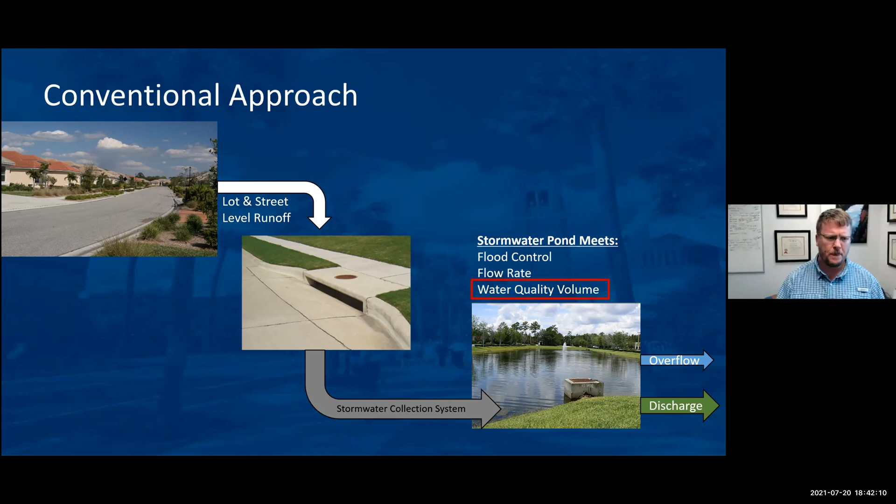And so that water quality volume is something I'm going to come back to.

Here's a breakdown of the size of rainfall events that stormwater ponds are generally designed for. We're dealing with stormwater runoff from events that are 5, 10, 15, 20 inches. These are massive events, like hurricanes, literally 100, 200, 500-year storms, 1,000-year storms. This size of event might happen maybe once in that system or pond's technical lifespan.

But we have to control the flooding up to a certain level, and usually the minimum is controlling up to the 25-year event. So for the Daytona Beach area, this is somewhere around the 9-inch storm event for a 25-year, 24-hour event. A 100-year event would be higher, and so forth. But essentially 9 inches of rain, that's a lot.

For example, we just got about 8 inches from Elsa that came through Gainesville at my house. That's been basically the most water we've gotten, even more than what we got from Irma. So, these are major events.

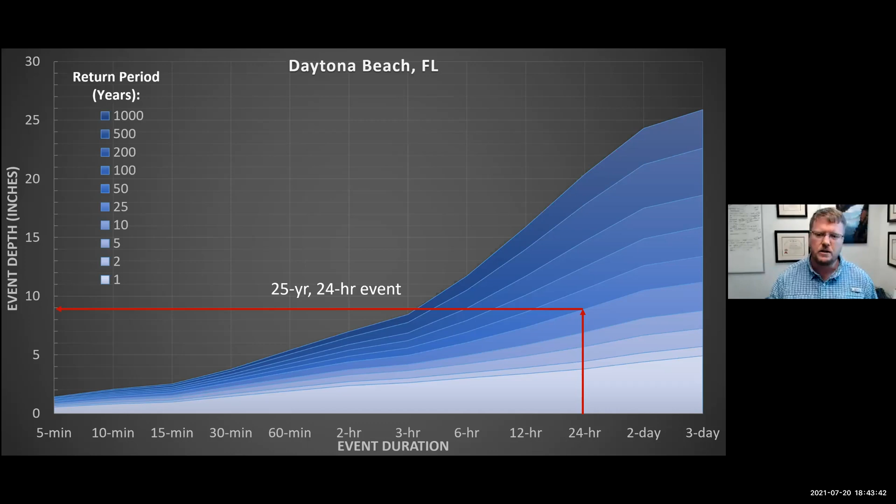But from the water quality standpoint, what we see is that stormwater ponds are designed for these large events, typically for flood control, but they aren't meeting the performance they're credited with. For example, they're credited with 80% removal of nitrogen and phosphorus. The basis for this was essentially that if stormwater ponds can remove about 80% of sediment, the thought was that nitrogen and phosphorus would be removed in similar fractions.

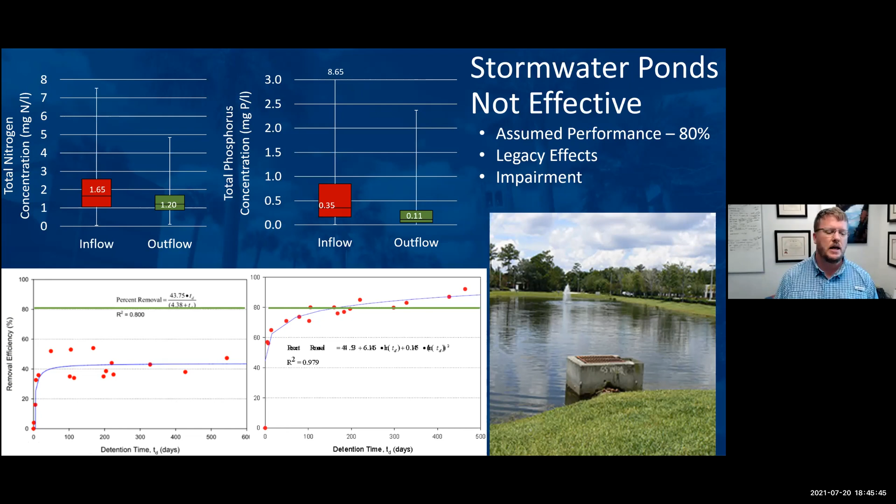Now, runoff is not the only source of contaminants and nutrients to our water bodies that goes along with urbanization. To some effect, septic systems, depending on where they're at, how they're maintained, and depending on their density, can also have an effect and impact on water quality.

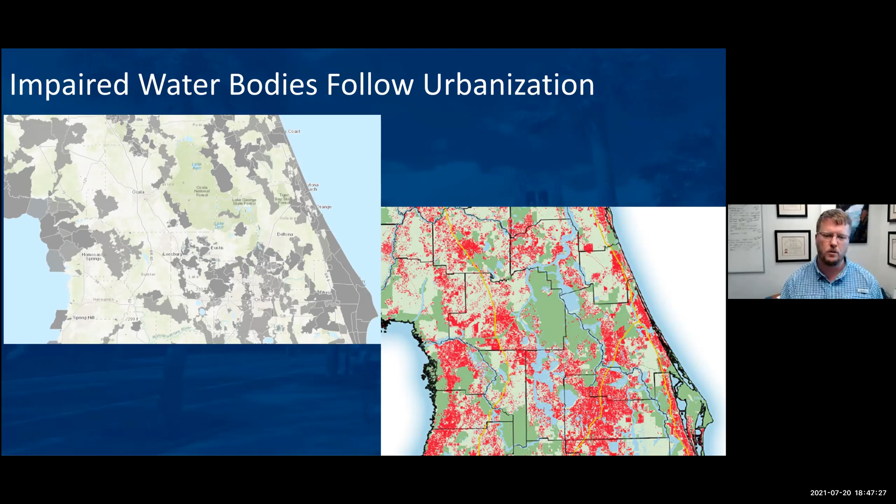But particularly in the highly urbanized areas, we tend to see that those small water bodies, those small watersheds, are heavily impacted by stormwater runoff in a multitude of ways, either through the addition of nutrients not being removed through stormwater ponds or lack of stormwater management, or through bacteria and other contaminants that can impair water bodies. And if we zoom in and look at Volusia County specifically, there's a lot of issues going on.

In this case, just about the entire county is covered in either a TMDL, BMAP, or some other type of plan meant to reduce or mitigate the impacts of whatever activity is going on at the surface. Some of these may be agriculture related, some may be wastewater or septic related. But many of the water bodies, particularly in the Daytona Beach area and growing out from the Central Florida, Orlando area, are in urbanized or urbanizing areas. And the way we're doing stormwater management is not going to continue to protect those water bodies or improve them in most cases.

So this essentially leads into why we need a paradigm shift in many ways. And the ironic thing is, as Katrina said, LID is not something brand new. It's really been around since the late 80s, early 90s, pioneered in Prince George's County, Maryland, and some other places doing similar things. Essentially, it's just a change in the approach to site design, understanding what the site offers and trying to work within that.

I mentioned early on that I wanted to separate these terms, LID and GSI, or low impact development and green stormwater infrastructure. A lot of times these terms are used interchangeably, but I hope with these definitions you'll see that there's a difference. It's subtle, but it's really critical to the whole development process and where these come into play.

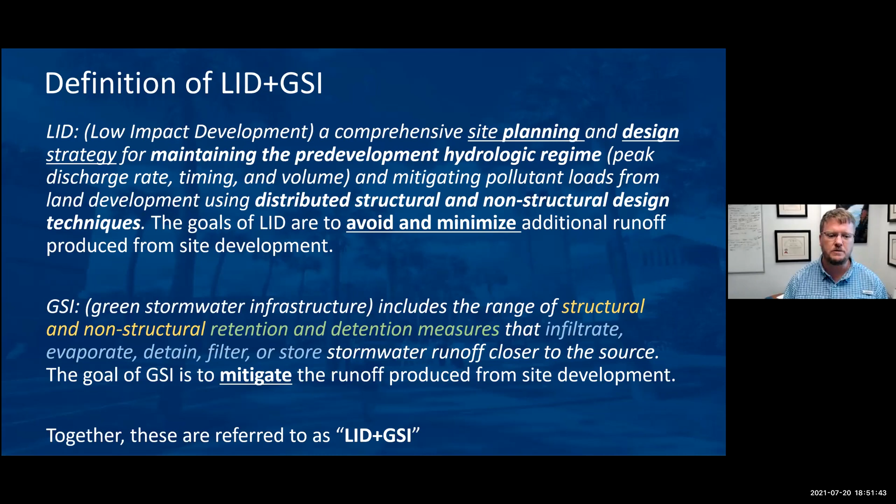So the cost of low impact development, does it save money? Is it more expensive? Well, it depends on a lot of factors. Every site is going to be different, and that's a broad answer we get when asked if LID is cost effective. Well, it depends, that's an easy way of avoiding the answer. But I hope to show some ways certain projects do save money and what strategies they use to implement LID that result in reducing runoff and reducing costs. The EPA has even put together several resources, some of which I'll touch on here.

So let's get into a little detail here with the planning stage in LID. And I'm going to be perfectly honest.

The content on the next page and a few others that I come across at the very bottom, I will blatantly say I stole it with Tom Singleton's permission from a manual he put together for Winter Haven, and this is verbatim. But I have gotten approval from Tom to use and abuse it. I think he just did a really great job hitting the nail on the head of the key steps here, and I want to pass those along.

So the first step, when we're looking at avoiding the impacts, basically we want to map and protect whatever the green infrastructure is on the site. What are our depressional areas? Where are the forested areas? Where are the areas that have a lot of value and resources?

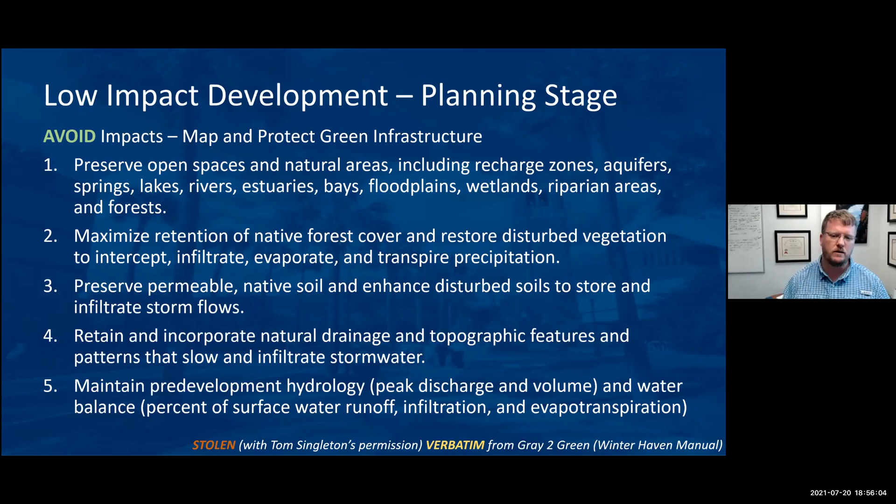So a couple examples here. This is a development that was proposed in East Central Florida. Some of you may be familiar with this. It's not too far from Volusia County. In fact, it may be in Volusia County, I believe. It's a site called Restoration.

The original site design, if you look on the west side of this site, essentially had a lot of wetlands in existence, a lot of poorly drained soils, and the site that was being proposed was essentially spreading out and utilizing the full site environment. That was sort of the conventional approach.

We went back to the drawing board, worked with some folks here in our program for resource efficient communities and others to kind of re-envision what this site could look like, taking the LID approach. What you see on the right is essentially what they came up with. They were able to, through compact design and compact development, concentrate the disturbance of the site and the change in the overall site hydrology to the east side. It basically snugs up against I-95, which is on the eastern boundary there.

What this did was it preserved those wetlands. What you see in the brown area here was, if I recall correctly, basically a trail system, trying to use the recreation areas. But this also allowed the wetlands to maintain their hydrologic function. What we see is when we have large flooding events, large rain events, the wetlands flood, and that's where the water should be stored, not in our residential areas or in artificial structures, or at least we can use those wetlands for that large storage.

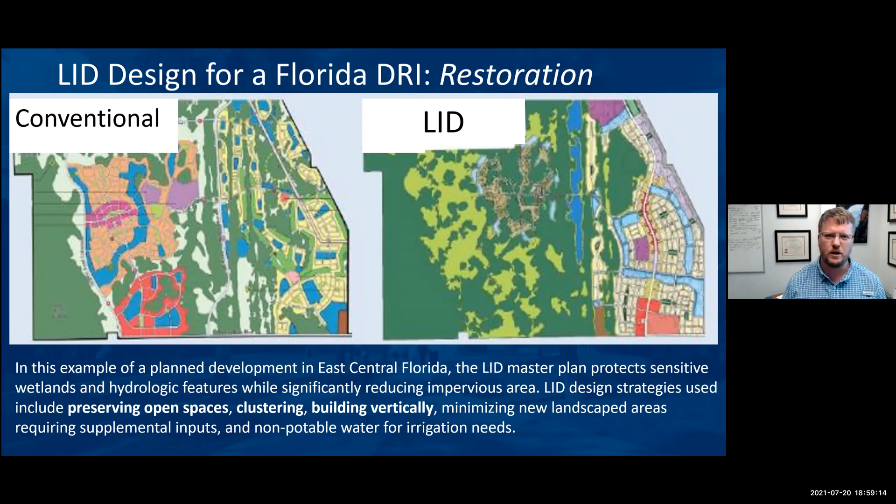Just some examples here of site planning. Number one, getting away from master grading, complete site clearing, which ignores what resources are on site. That first step of site clearing and grading sets the course for the overall site, and that really starts at the planning point. If the plan starts with clear cutting and master grading, you're locking into a more expensive drainage system, because you're going to run pipes all over the site and need stormwater ponds for all that area.

Preserving those natural areas and looking for ways to consolidate and condense the development, not reducing the number of units, but looking at how the development can be more compact and limit the disturbance. If you're limiting the site disturbance area, you're limiting the area where you have to manage stormwater runoff. There are many iterations of this, but on the right is a comparison between a conventional site design and a low impact development site design.

We're limiting the amount of roadways here. You see we've got two basically islands in the LID design, but we've drastically shortened the roadway length. We've got a lot more open space and area remaining in conservation. Those conservation areas are oftentimes utilized for recreation or for storage during large storm and flood management, utilizing those natural vegetated site depressional areas for what they do anyway, collecting stormwater runoff during large events to manage it on site.

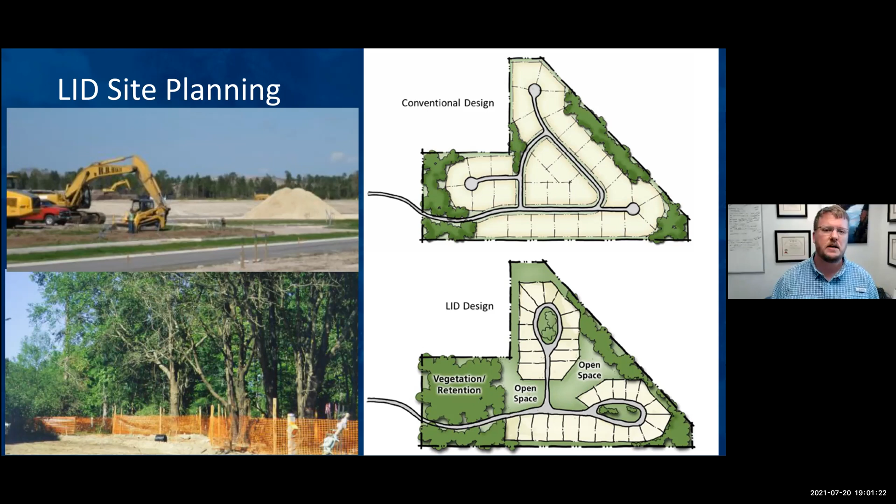Moving into the second part of this, minimizing the impacts. So you've identified where the critical resources are on a site, looked at where you want to avoid and protect areas, and tried to compact it as much as possible. The next step is looking at how to minimize those impacts, basically fitting the project to the site rather than trying to fit the site to the project, which is often where we see the disconnect.

Step six is reduce, minimize, disconnect, and eliminate impervious surfaces to maximize infiltration. Think about conventional site development, maybe your own home, since this is pretty prevalent wherever we are. A raindrop falls on the rooftop, flows over the roof, maybe goes into a gutter, or falls onto your driveway, then flows into the street, down the curb and into a storm drain inlet, through a pipe, and eventually into a stormwater pond.

That raindrop never has the opportunity to actually infiltrate into the ground. We've basically removed that as an option. So one of the biggest things that can be done to mitigate or minimize that is minimizing the imperviousness, and then if there is imperviousness, disconnecting that imperviousness.

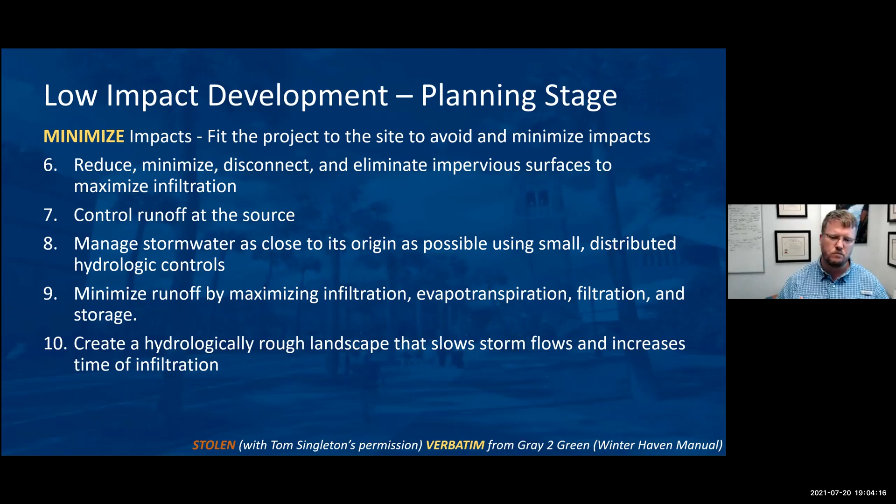With soils, the amount of water it can take in depends on the soil properties, specifically its infiltration rate. If water moves across it too quickly, it doesn't have an opportunity to work its way into the ground. Having a longer residence time or flow path through the development allows for more processes like infiltration, biological treatment, and chemical treatment to improve water quality and reduce volumes.

A couple more goals are to employ natural processes for water quality improvement, extending the time water moves across the landscape, and increasing the reliability of storm systems by providing multiple redundant runoff controls. When we talk about distributed stormwater practices, it's not just spreading it out across the site, it's also creating redundancy, so if one practice fails or needs to be taken offline during a storm event, the overflow often goes into another practice downstream before it still gets treated and has an opportunity to be infiltrated.

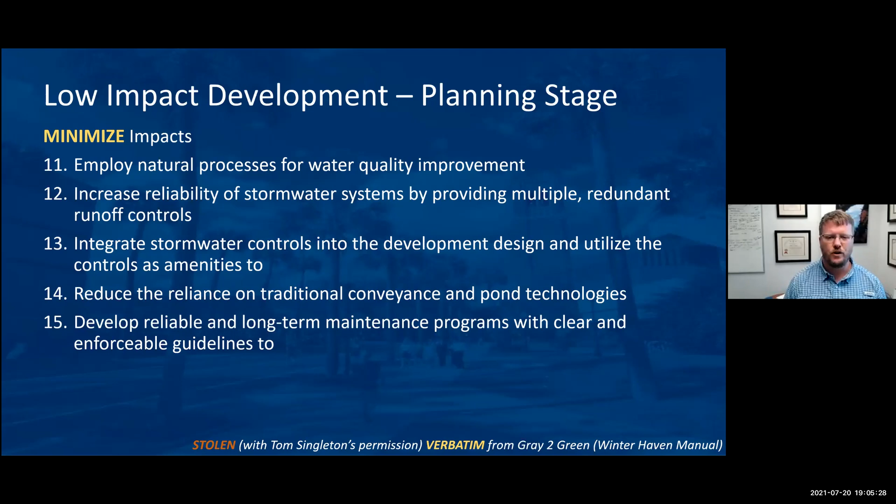We want to integrate stormwater controls into the development design and utilize them as amenities, reducing reliance on traditional conveyance and pond technologies. Finally, we develop reliable and long-term maintenance programs with clear and enforceable guidelines to make sure these practices function over their lifespan.

So what do these non-structural practices look like? We talk about reducing the impervious area. This points to a shortened driveway — we don't necessarily have to have a really long driveway that separates the house from the street. This saves impervious area and reduces the amount of runoff.

We have vertical construction here, where we could have had single-story construction, but instead we've gone to two stories, cutting our footprint basically in half and reducing the amount of impervious cover.

Creating areas near where the source of runoff is being contributed — for example, rooftops, instead of having gutters, if we can avoid it, the water flows instead of onto impervious cover, a roadway, or into a drain. We have natural areas off to the side of the lot where that water can collect and infiltrate. This is a curb cut, a very simple design that allows water coming off the roadway to exit into this natural area to infiltrate.

Maybe one of the most common ways this is realized, not even intentionally, is through the implementation of swales and bioswales — we'll get to the difference between those. Swales are a great tool; unlike a stormwater pipe, the water in them is held in place. The stormwater swale allows infiltration as water flows through it, and any depressional areas capture and hold back water, allowing it to infiltrate without flowing downstream. This also provides disconnection of the impervious area, giving another opportunity to reconnect the hydrology of the site.

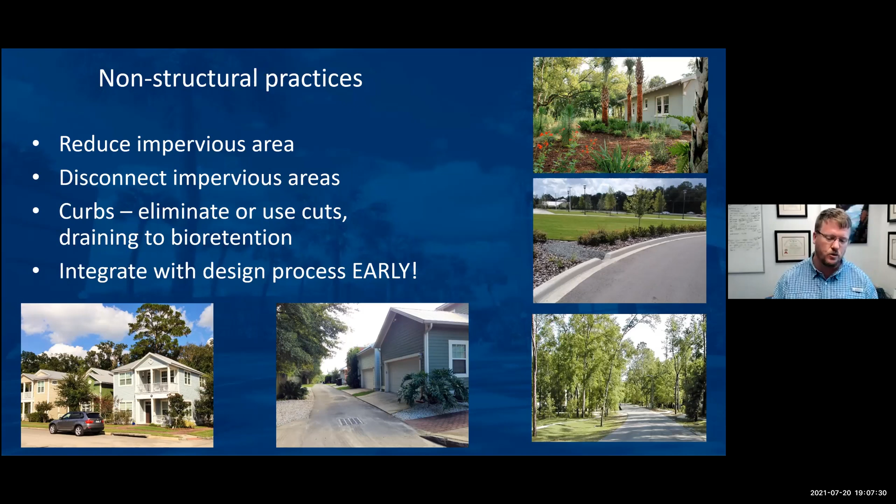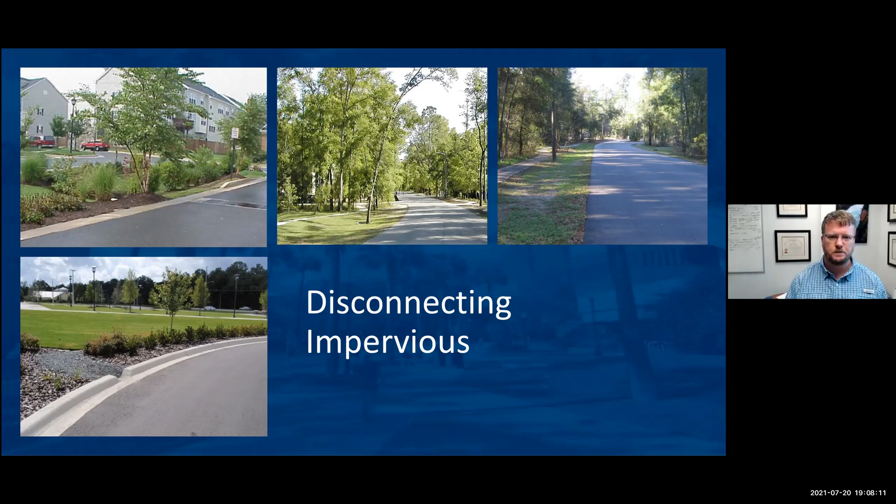Some more examples of disconnecting impervious cover are right along the roadways, within the right of way, which avoids having stormwater management practices encroach on individual lots where maintenance may be an issue, or a homeowner might decide they don't want a swale or rain garden on their site. If it stays in the right of way, we maintain function, and these linear systems can be rather effective.

Traffic islands are not as common in residential areas, but you'll see these in a lot of commercial areas and parking lots, where we're taking advantage of the opportunity that's there. In this case, it's not really what was there before, but what's typically designed and incorporated into parking lots and site designs.

So leveraging those areas where it would have been just a grassed area, maybe elevated, and instead turning it into a depression, allowing some of that water to go into an area and collect and infiltrate on the site. This picture in the middle goes against what I'm about to say, but it can create an opportunity with GSI by incorporating, for example, a rain garden or bioretention cell in these islands, so you don't have to do mowing of that infrastructure on a regular basis. There's different maintenance that goes along with it, but oftentimes it's less intense.

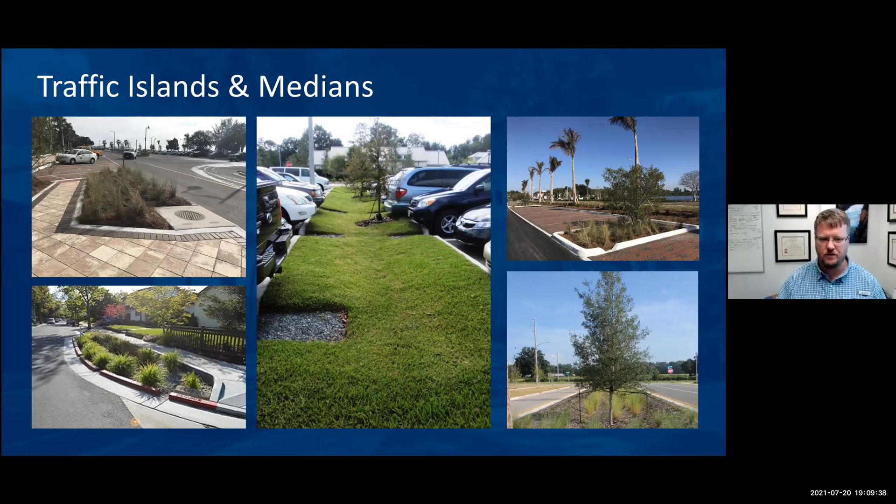Now, I include this picture though because at the end of the day, you can have a bioretention or a rain garden or a swale here that is grassed, and it provides a function. It may not be as easy to maintain, it may not be as effective in certain cases, but it's still an option if you have to go with that.

So then the third part that I've stolen from Tom in this way is getting at the green stormwater infrastructure. Part one was avoiding the increase in stormwater runoff. Part two was, hey, we've tried to avoid as much as possible, let's minimize the amount of runoff that's being generated. And then part three here is essentially, how do we mitigate the runoff that's being produced?

Green stormwater infrastructure and looking at different types of practices. Now, not all of these practices are going to be realistic for all situations, and I'll come back to the compatibility between GSI practices and the development setting a little bit later on. But you can see some examples of common practices that are used and can be integrated into developments. Now, I want to say one thing.

Ideally, we like to see LID and GSI coupled together, but you often will see that LID is disconnected from GSI. And what we really see oftentimes is that we'll see an implementation of GSI without really the site design and planning that comes from LID. So, for example, I went to a recent, pick your big box store, and essentially what I'm seeing...

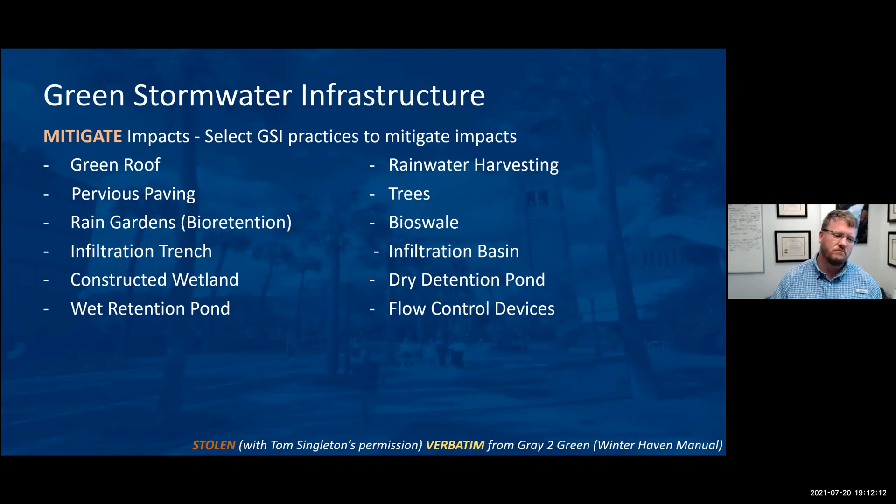Coming back to this diagram that I had earlier, and this really gets at green stormwater infrastructure. This is the size or the range or the scale of storms that our stormwater ponds are designed to be able to manage or capture and convey. We're looking at storms that are on the order of several inches, tens of inches, over certain, several hours or over the course of a day.

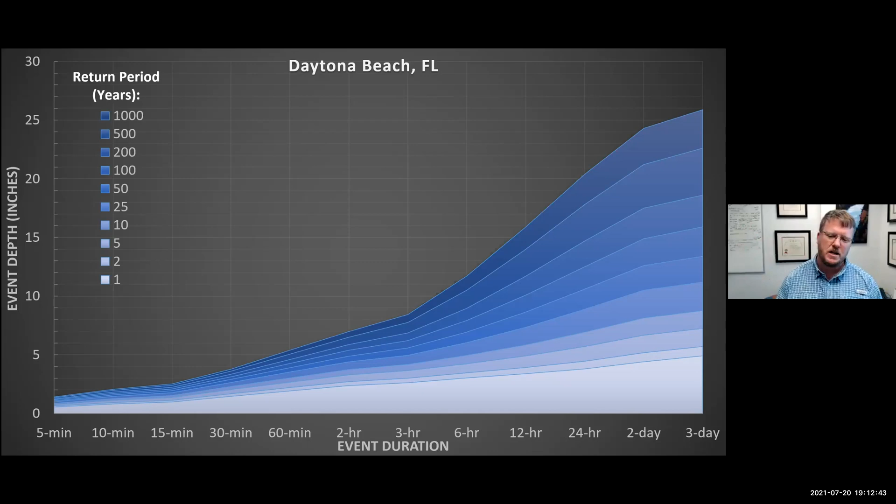But if you look at the actual distribution of rainfall events, this took the rainfall data for 30 years from Daytona Beach Airport, and basically took their daily rainfall, anything that was a tenth of an inch or more, and just ranked it and looked at what the percentage distribution was. And what we see here is what we see in a lot of places, that the overall majority of stormwater events that happen on a regular basis, these small events that transport pollutants from the watershed into our stormwater ponds...

Or into our water bodies, they're pretty small. So for example, in Daytona Beach, about 80% of all storms that would produce runoff, that's where that 0.1 inch comes in. If we have less than 0.1 inch rainfall, really don't call that a runoff producing storm in many cases. So if we have 80% of those storms are an inch or less, we're not talking about a huge volume. We're not talking about this massive volume that a stormwater pond needs to manage.

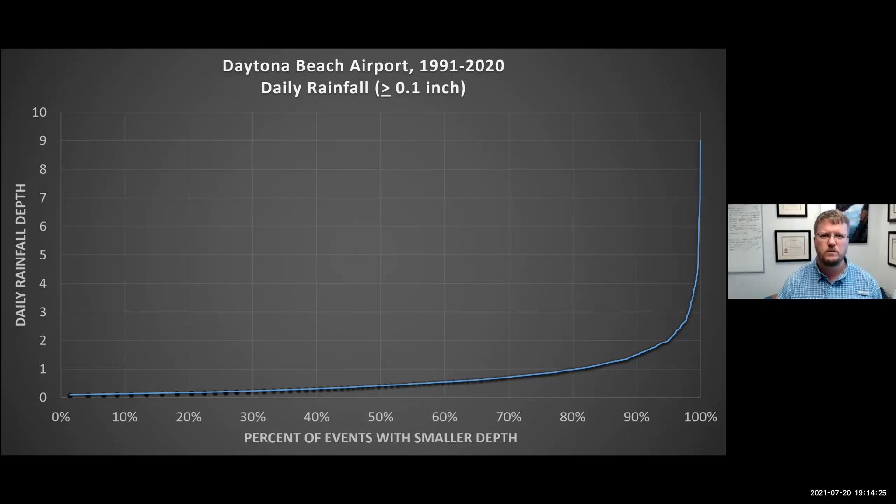So for these regular storms, 80% of storms, we're talking about pretty small volumes that need to be captured, filtered, infiltrated, or managed, moving it through the site. It's interesting how it kind of lines up with certain values. So if you want to remember, 80% of the rainfall in Daytona Beach, 80% of those events are about an inch, 90% is about an inch and a half, and about 95% is 2 inches or less. It's an easy way to remember that.

This figure is where I wanted to talk a little bit about the compatibility of green stormwater infrastructure with certain development zones. I'll talk about the cost of permeable pavements in a bit, but oftentimes that's used as an example of, oh, well, LID is too expensive. Well, yes, in certain cases. I wouldn't use permeable pavement in a rural or low density residential area. It just doesn't make cost sense unless I can reduce or eliminate a stormwater pond, or the cost of land is really high.

Same with green roofs. I would even say that the figure here showing that green roofs are in general urban zones might be a little bit generous. I'll show some examples of why green roofs just aren't the best option for stormwater management or GSI from a purely cost perspective.

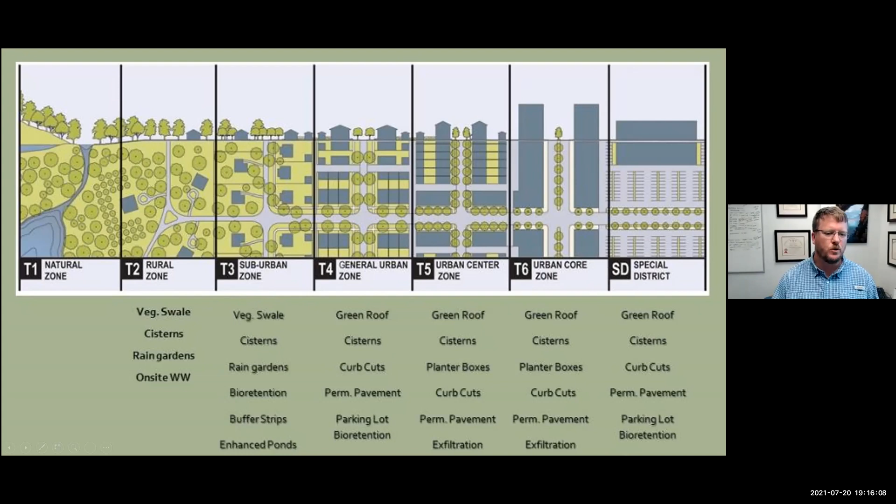But you see that as we move from different development styles or development densities, we have different types of GSI practices that get integrated into that landscape. You think of the roadway cross section, what kind of fits within the available space to give that functionality we need for stormwater management, these regular small scale storm events to protect our water quality and manage those larger storms as well. So you'll see there's a transition that occurs.

I like this figure because it goes into a way of thinking about how these GSI practices are a lot of times different repackaging of similar functions. When I think about GSI practices, I think about their primary functions, and that's what needs to be maintained, that's what needs to be emphasized, and how do we incorporate that function into that landscape or development area.

So for example, from over here on the high end, or the high function end of treatment, we have constructed wetlands, infiltration basins, bioswales, that have a lot of biological treatment, but they're repackaged at different scales, different functions. We have permeable pavement, which is primarily infiltration trenches, rain gardens, tree box filters. It's all kind of the same primary function, but it fits into the landscape differently. Permeable pavement is for typical impervious areas. Tree box filters and infiltration trenches are your linear areas where a lot of that water can infiltrate.

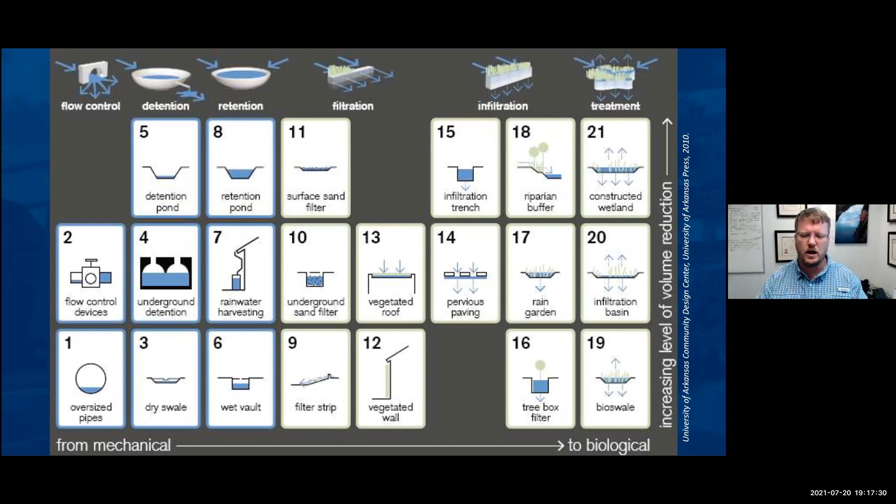Permeable pavements, as I mentioned, I'll be honest, are one of my favorite GSI practices because it allows you to basically park on, drive on your surface while also having stormwater management within it. It's probably my favorite practice. If you look at porous concrete or porous asphalt, the way to identify it is that if you look really close, it basically looks like a Rice Krispie treat. That's how you can identify it.

Permeable pavers or pavements are a little bit different, where the infiltration occurs between the pavers themselves, typically with a gap between them. But when you get below the surface, porous asphalt, porous concrete, or pavers, the profile is pretty similar. You typically have different stone aggregate layers that have a porosity meant to receive rapid infiltration of rainwater or runoff, so it can be stored and built up, usually within a depth of about 14 to 16 inches. Then that water is allowed to, over time, slowly infiltrate into that subgrade soil.

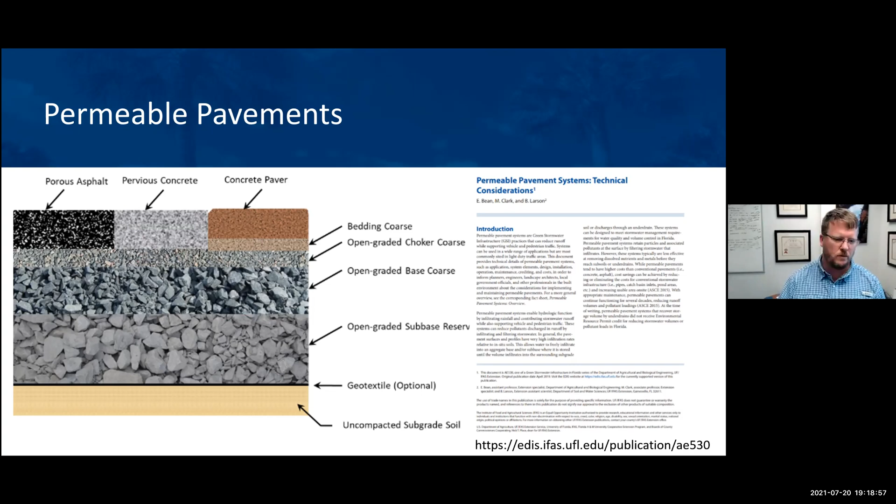We have an extension document, an EDIS document, if you go on IFAS, that goes into the technical considerations of permeable pavements and covers a lot of factors. One of the main ones is cost, looking at how these different types of pavements' costs range. What we see is that there's a difference between looking at just the pavement surface, the actual porous asphalt or pervious concrete material at the surface, and then considering the cost of system installation.

This is going to be more expensive than conventional concrete or conventional asphalt. However, that's not really comparing apples to apples, because conventional pavements also have to have a pond or some other type of stormwater treatment to go with it. The real comparison is looking at this cost compared to the conventional pavement plus the cost of the necessary stormwater pond or other stormwater infrastructure.

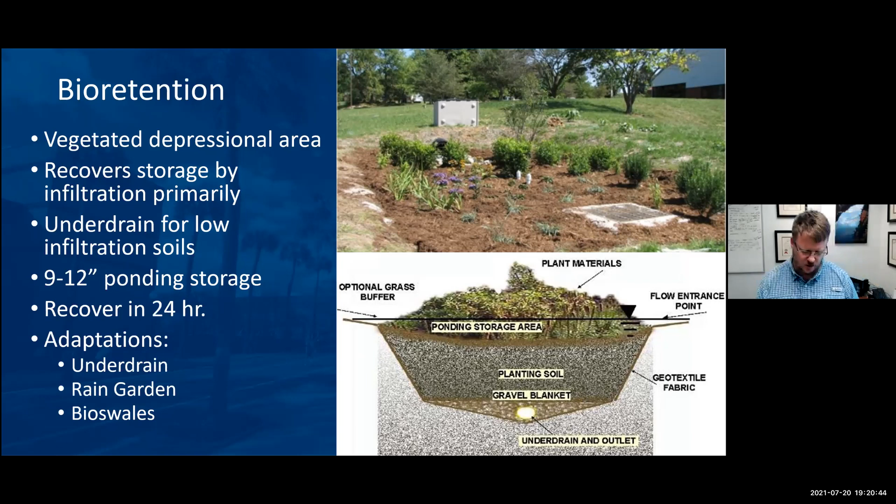Bioretention is another common practice that is easy to incorporate into the landscape. Oftentimes these are kind of the vegetated depressional areas. You can make use of existing depressional areas or construct your own in the design. The primary function is to capture and then rapidly infiltrate. We want these to infiltrate within about 24 hours, to avoid them becoming ponded and stagnant, becoming mosquito pits. If we have soils that are not well drained, we can put in an under drain, which can help reduce the time it takes for water to draw down. There are several different ways to do the configurations that I'll talk about in a minute.

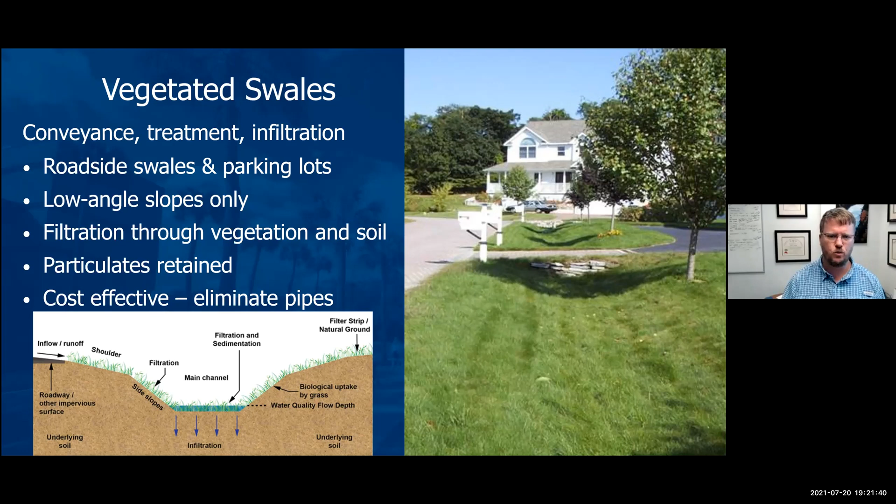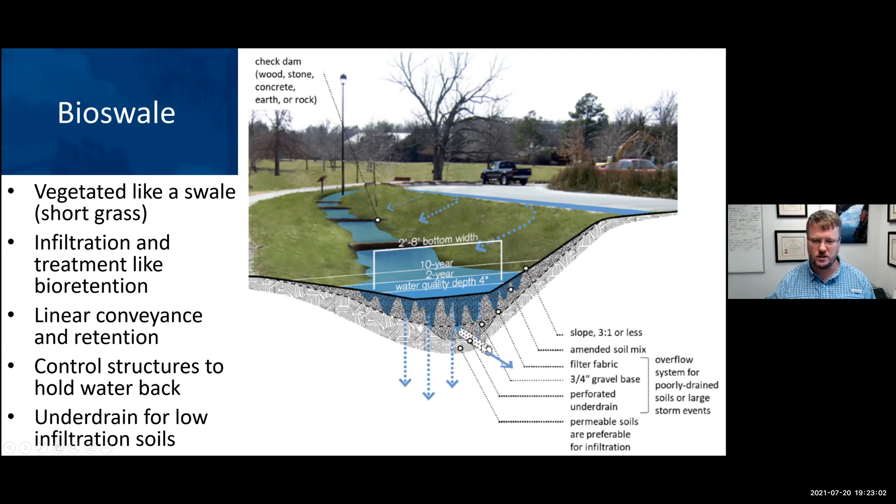This is an example of one that we have here in Gainesville. It's a little bit more urbanized than a residential setting, but it shows how this can be implemented into a very narrow right-of-way and still have quite a bit of functionality. Essentially what happens here is you can see there's a row of bioswales or cells upstream. Water comes straight off of the impervious area, and it overflows these little half walls as water builds up in each cell. The upstream and downstream cells are connected by a pipe underneath, and there's an underdrain pipe that goes underneath the full length of the system.

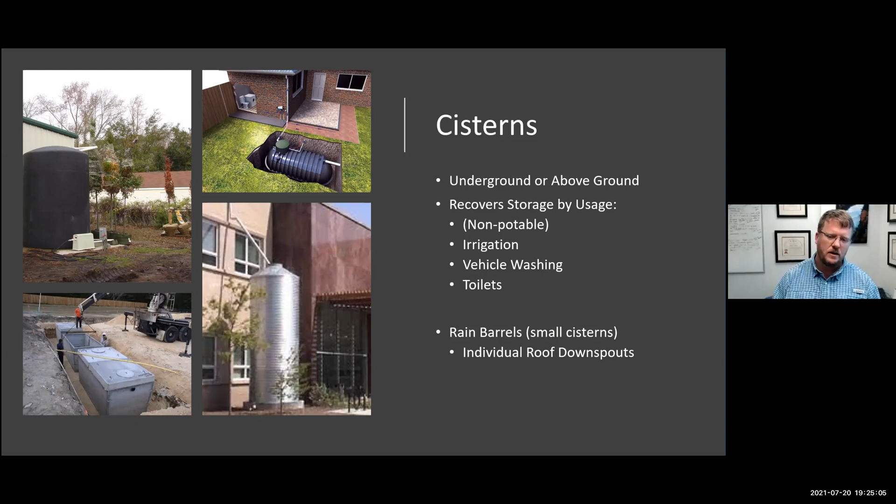Cisterns are getting into practices that are more appropriate for higher density or higher urbanized areas rather than typical low or medium density residential areas. But cisterns can be a very useful practice, particularly when it comes to water conservation, and there are several different ways to do rainwater harvesting. For example, you can have cisterns or large tanks that are above ground or below ground. Or for a reservoir of some type, there are large bladder bags that can go, for example, underneath a deck and fill up with rainwater to be used for irrigation, which can be a water conservation method for homeowners. But essentially these tanks can be above ground or below ground, and the main concern is making sure there's a use dedicated to using that water on a regular basis, so that volume is recovered in between storm events and is available to capture.

Nutrient separating baffle boxes, it's kind of borderline whether it's green stormwater infrastructure. It's a good way of integrating several different processes into a stormwater pipe system, or kind of a retrofit.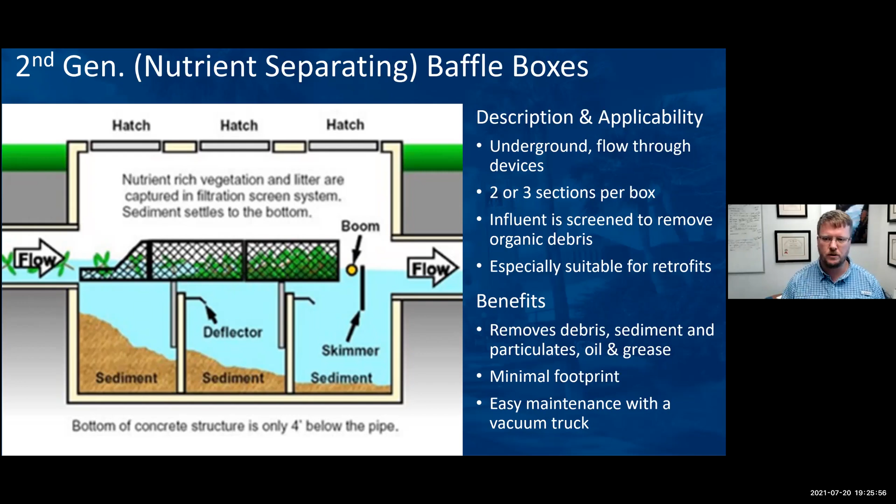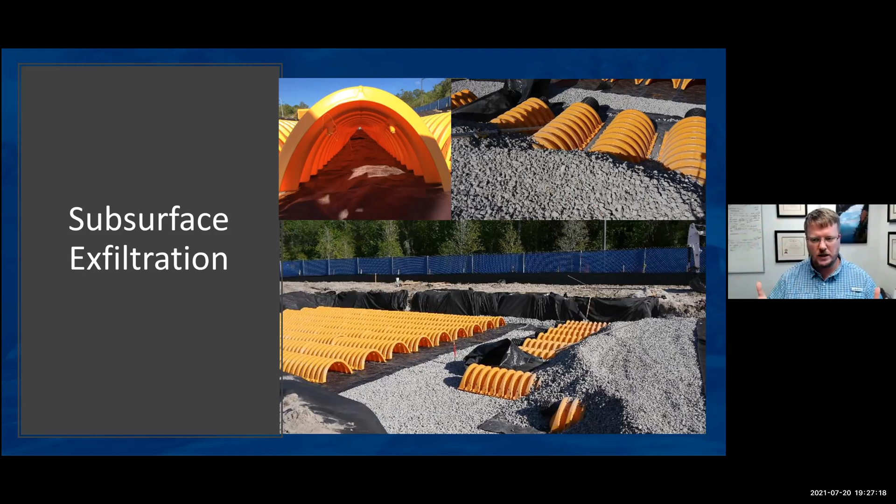This network of half pipes and drainage infrastructure is put down in the ground. We have a filter fabric underneath the half pipes, and a stone base layer separates it from the subsoil. On top of this, it gets filled with a stone aggregate layer, and then we build the parking lot or roadway on top of that. So the runoff from that area goes right below it, and it can build up quickly and infiltrate over time there.

So green roofs, I'd be remiss if I didn't mention it. Green roofs are essentially trying to create a very shallow vegetation cover on the rooftop of buildings. The idea is that there's a certain volume of water that, when the rain falls down, is captured into this thin soil layer. Typically about an inch of water can be captured, but some larger implementations might have a deeper rooting depth, up to maybe even a foot of soil medium.

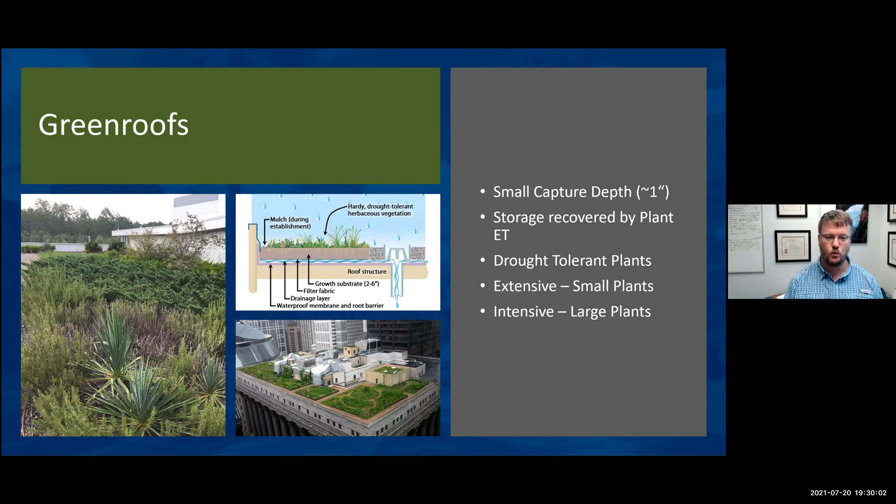Okay, getting into case studies. This really gets into the brass tacks of where LID saves money. I'll be honest, there are only a few example case studies from Florida that I could find, but the trends and the ways that LID saves money in these other example cases are consistent. These have been implemented - these are real cases around the country. The way that LID saves money is pretty consistent, and hopefully you'll pick up on that.

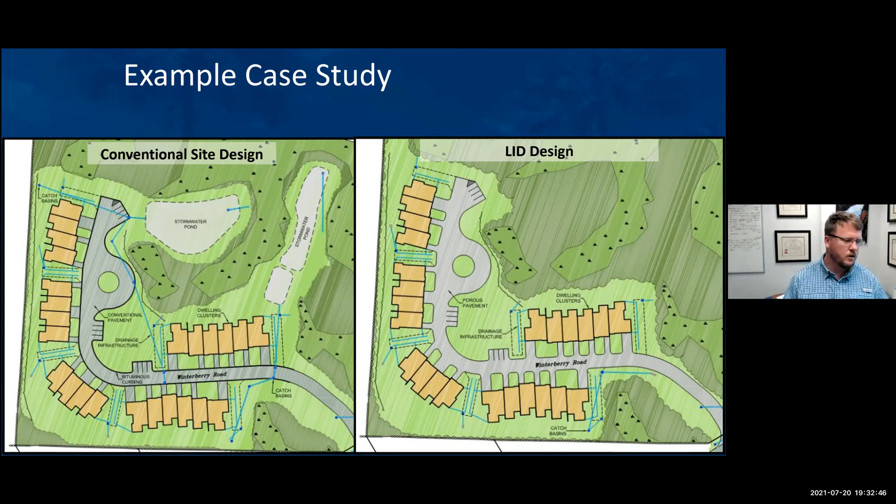So when we look at the comparison between the conventional design and the LID design, the LID design avoided 1,616 feet of curbing, 785 feet of storm pipe, 8 catch basins, 2 detention basins, 2 outlet control structures, and 1.3 acres of land clearing. All of those kind of add up.

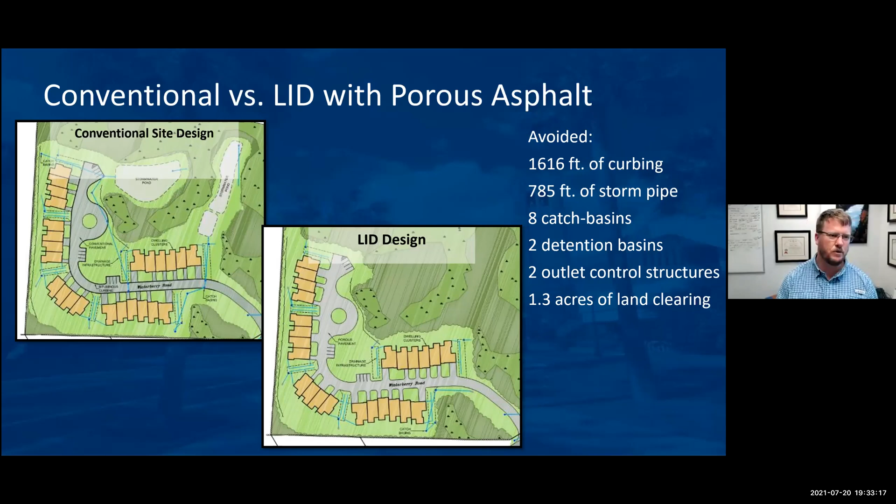Now remember, they used permeable pavement though, and that's more expensive than roadway. This is a good example here of where it comes in and makes sense. Site preparation - this cost is looking at the grading and the clearing. We have less area with the LID, so we have less cost with site preparation.

Temporary erosion control - well, we have a smaller disturbed area, so our temporary erosion control is less. Our drainage, we reduce several things as far as stormwater ponds, our catch basin inlets, and all that infrastructure. Roadway was a higher cost because they used permeable, or porous, pavement. The driveways were also porous pavement, so those costs increase.

But just looking at those 2 items doesn't look at the whole site. Curbing - we eliminated the curbing from the LID design, saved us $6,500. Permanent erosion control, we were able to save again almost $20,000. Additional items kind of came out in the wash, the buildings stayed the same and those are basically the same, but overall they saved $49,000 on a $4.4 million project - overall 6% savings on total costs of the infrastructure for what was a 0 discharge site.

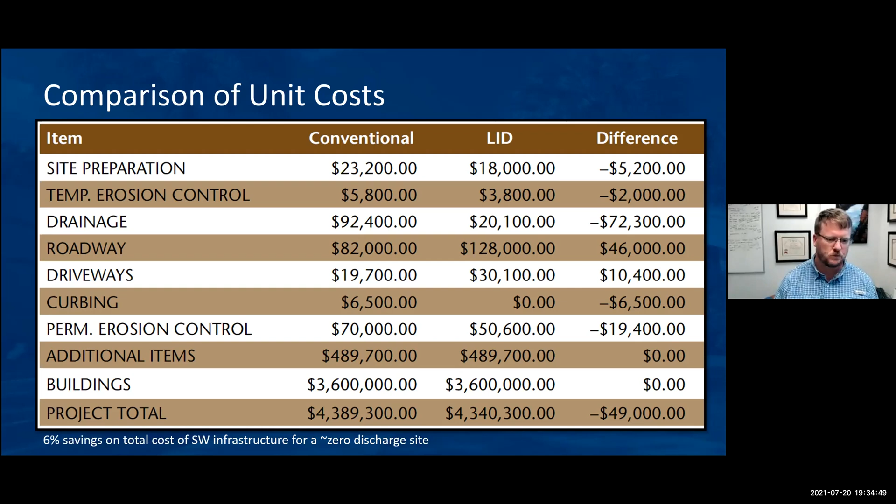So that's one example. The EPA has a document that covers a lot of case studies, ending up being from a lot of areas in the north of the country. I'll get to a side point as to why these case studies are so hard to find - we'll answer that in a little bit, at least why I suspect it is. But this document did a nice job of working out the costs for conventional development versus LID and what those cost differences were.

Now, if you're looking at these numbers, there's probably one of these sites that's really standing out, and it's probably Kensington Estates. Holy cow, they increased the cost from LID by $737,000. The price difference was almost double for the stormwater management. And I saw that and I was like, what in the world? What happened here? Why is this the case?

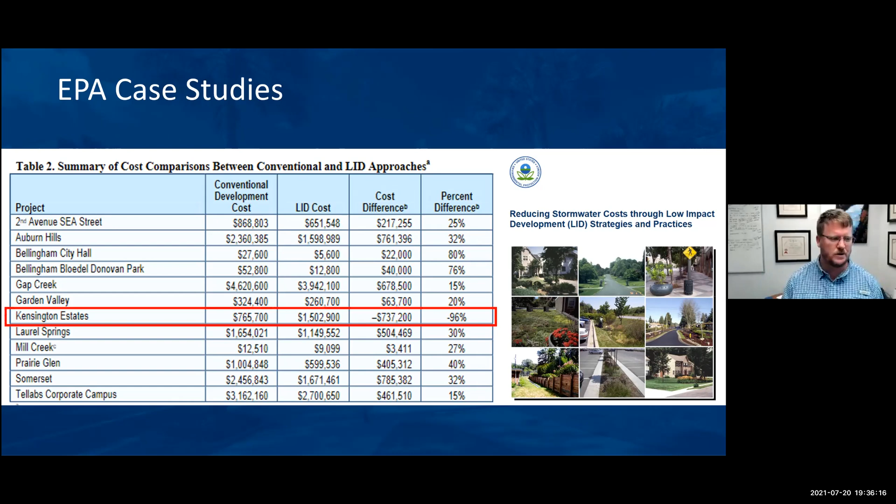When you look into what the LID comparison was, again, I'm not sure it's apples to apples when the LID proposal included rooftop rainwater collection systems for every house. It's not the approach that I would take or recommend that's most cost effective.

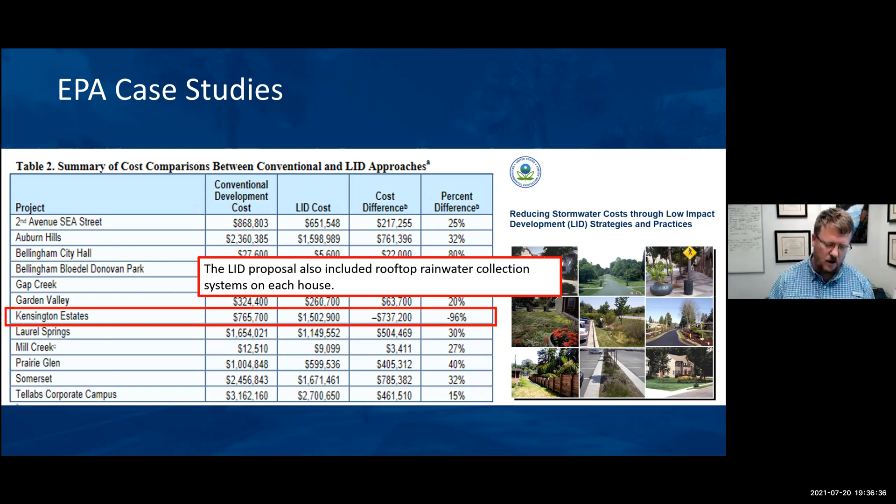But you look at all the other ones, and I'll go through some of these of how these are saving, where the money savings comes into play.

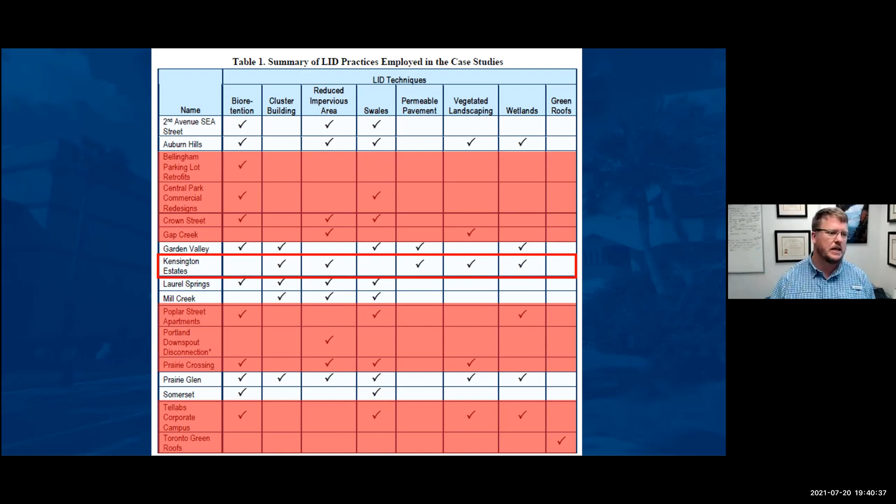And only a few of these are residential for the most part. Only a few of these use permeable pavements, okay? And this was, again, sort of that Kensington Estates that had that really high pavement cost. The permeable pavement was partially to do with that, okay?

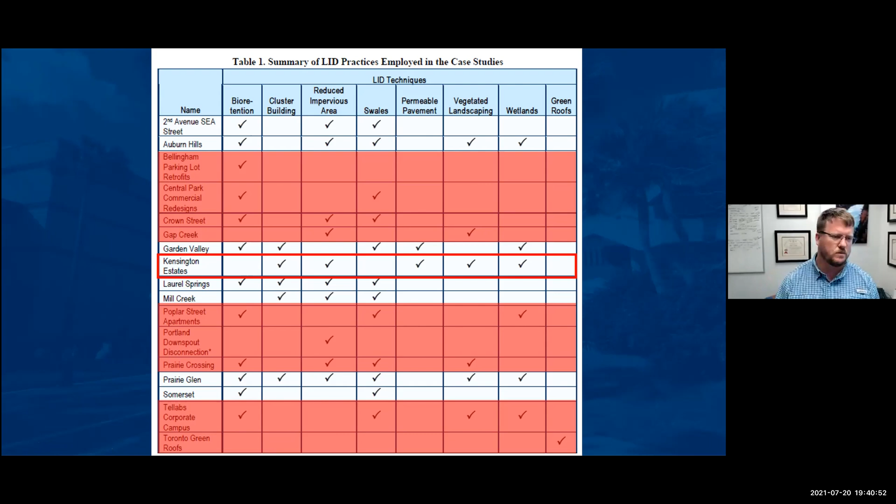So I have a few case studies to kind of report on that are from Florida. Student Daniel Penniman did this work for his master's, and there's two from sort of our region, so to speak.

The first one here is a Central Florida residential project in Lake County, kept anonymous for good reason in some ways I'll get to at the end. The site was 170 acres, projected to have 493 new residential units. The soils here were decent, pretty average, a B soil - like a loam with a moderate amount of fines, not a heavy clay like you'd find in the Panhandle, but not a well-drained sand either. The depth of the water table wasn't well drained - in some areas 3 to 6 feet, which starts to affect some of your options for infiltration on site.

So how did this break down? The conventional design was essentially 3 centralized retention basins, requiring 750,000 cubic yards of grading and 14,000 linear feet of stormwater piping. By comparison, the LID GSI design was 26 shallow storage areas - think of these as bioretention areas or rain gardens - mostly connected via vegetated swales. They preserved 51 acres of existing green space used for recreation and large volume storm event stormwater management. This saved basically 300,000 cubic yards of grading and 12,000 linear feet of piping, with smaller pipes than the conventional design. Overall, they saved just over $2 million on the site - a 40% reduction for site grading, and a 92% reduction for stormwater management.

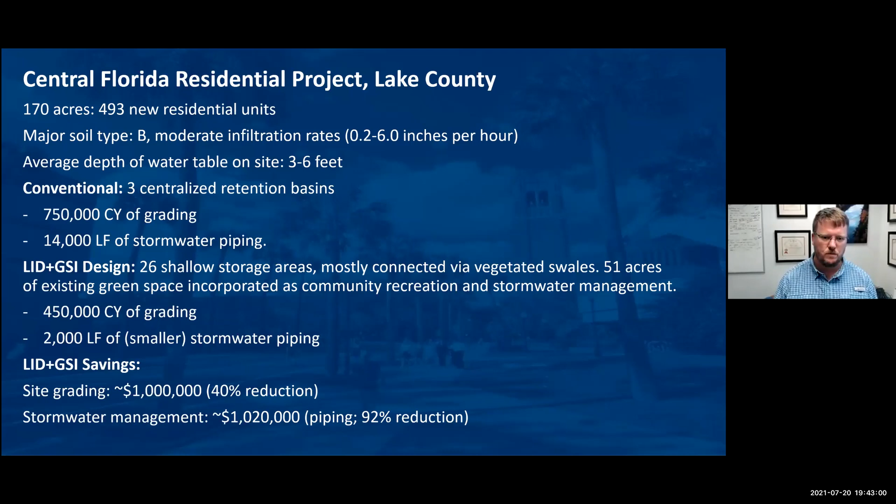So, another site, similar sort of case here. This is in Newberry, just west of Gainesville. The soils out there are pretty coarse, sandy soils with high infiltration rates - you see there, 2 to 20 inches per hour. The average depth of the water table on the site is well drained, way below the surface. The conventional pipe and pond technique was used for this site - that's your typical stormwater drainage - with 34 acres of retention ponds as part of that design.

For the LID GSI design, they connected a lot of these large open green spaces via what they called storm trails, essentially dry detention areas and stormwater conveyance incorporated with bioretention basins. This helped them maintain 55 acres of green space, 33 of which they used for recreation and stormwater infiltration. They were able to use what was available on site to limit their area of disturbance, their grading costs, site prep costs, and stormwater management costs. Overall, through the reduced need for culverts and retention facilities, they saved just under $3 million.

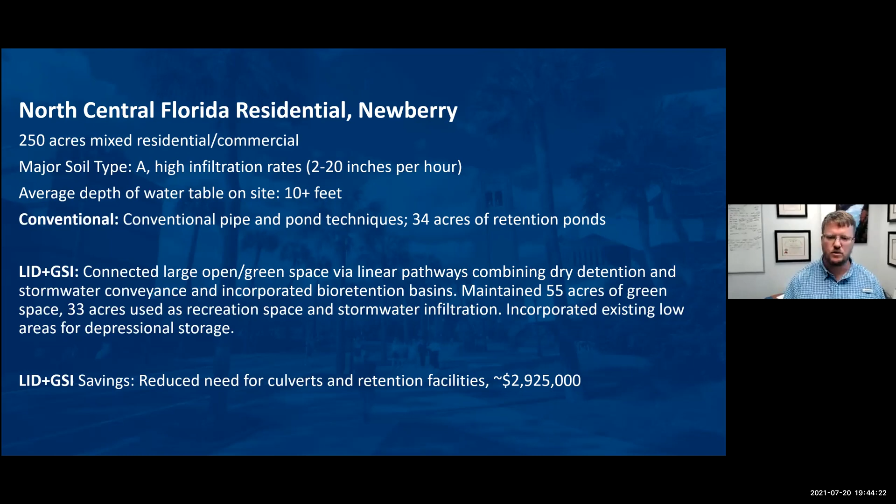So why is it so hard to find examples of cost savings using LID? Well, I'll put it this way - I had this discussion with Tom Singleton, and in the Winter Haven documents they have a few redesign projects showing examples, but none were residential - mostly high density urban, downtown, commercial sites. We got into this conversation about why it's so difficult to find these. If you think about it, say you're an engineer who designed a site, built it for your client, and then you or someone else goes back and redesigns it with green infrastructure and finds you could have saved your client 20, 30, 40% in site development costs - I don't know many engineers that are going to jump on that.

So it's difficult because there's skin in the game with that. Every site is different, but I hope you're able to see from these case studies that where the cost savings occur is pretty consistent, and how that emerges is pretty consistent.

Just to talk a little about stormwater maintenance - I'm getting close to the end here. One of my favorite quotes that applies to stormwater management is that another flaw in the human character is that everybody wants to build and nobody wants to do maintenance. Filters clog, plants die, and sediments build up. These practices, whether it's a stormwater pond with a 6-foot fence around it, a rain garden, a green roof, or whatever the practice is, all of them require maintenance at some point.

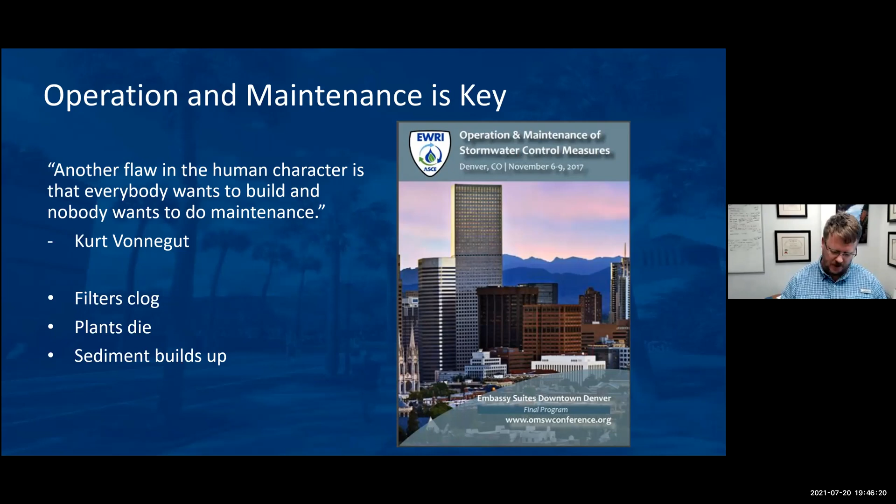Not doing maintenance is essentially just deferring it. We see that with the approach to LID and green stormwater infrastructure, where we're distributing these practices, we're looking at how do we maintain that function. So I use an adage called the 3 Fs: the function, the failure, and the fix. What is the function of these different practices? What is it supposed to be doing? Well, it has to infiltrate, it has to overflow properly. We have to look at those types of maintenance activities to restore the function, and that's critical to do on a regular basis to maintain that performance.

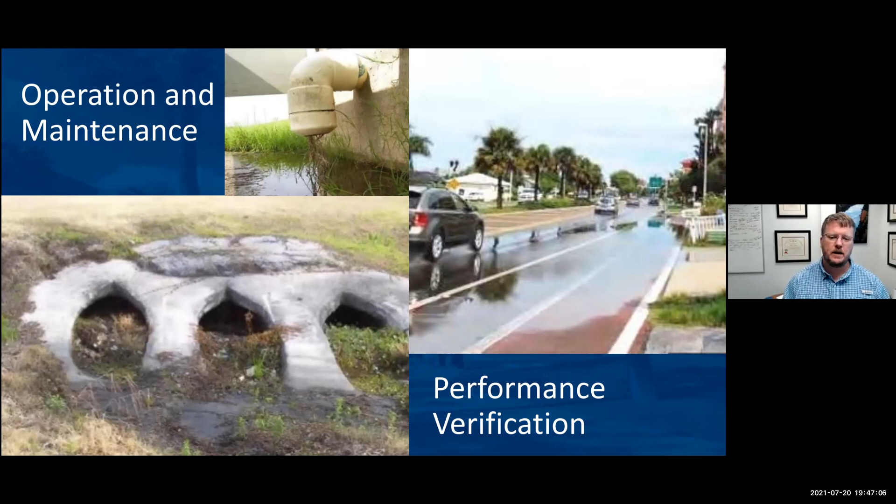A couple of points on maintenance. It's important to compare apples to apples. When we look at costs for LID or green stormwater infrastructure, oftentimes it's, oh, those costs are so high compared to a conventional stormwater pond, we don't have to do maintenance on our pond. That's not actually true. Unmaintained stormwater ponds have those maintenance costs, but they will come due and it will eventually catch up.

It doesn't occur until it's a crisis for the HOA or for that development, where they need to do it. Green stormwater infrastructure is in the landscape, kind of open, tends to be part of the active landscape. Those practices are going to be seen and observed, so when there is an issue, it's good that it's easy to identify and easy to see what's happening, and the maintenance can be done. Stormwater pipes oftentimes are, the cost to replace them can be pretty significant. Looking at where a lot of the cost savings is when you compare conventional to LID, a big majority of that cost was in the reduced stormwater pipe installation costs.

It's important too to consider the life cycle of the system. Routine maintenance a lot of times depends on the practice, so I hesitate to use broad generalities like it can be higher for LID and GSI. It's true, but in some cases it can be lower. It just depends on what that comparison is. But generally the replacement costs are lower for LID and GSI, and that's where that overall savings comes into place.

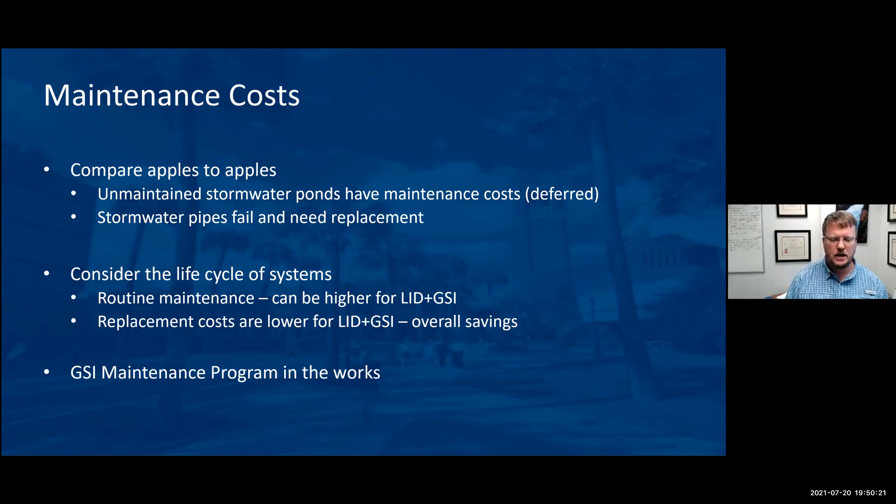I'll just make a note here that we are in the process of, we've submitted a proposal to DEP to develop a GSI maintenance program where we would train basically the folks who are already in the landscape. If you're familiar with the Green Industries BMP program that a lot of landscapers need to have, the idea is to essentially train those folks who are already in the landscape on a regular basis to identify failures of the GSI and train them on how to fix those types of failures that they find, to restore that function. We're hoping that gets approved by FDEP and gets started later this year.

Just want to put a plug for Winter Haven Resources. This is an example over on the right, where they were able to redesign a site that was actually the conventional site on the top, and then the lower cost LID site on the bottom there. This is their site for Winter Haven. They've done a fantastic job with some of their technical resources there.

This was another example of the cost comparison. In this case, a commercial site, a CVS I believe, that they had done there. By distributing the stormwater ponds on the site using the natural drainage of the site, they were able to save, in this case, $44,000. Again, those costs came from the reduced stormwater infrastructure that was needed, so that's where those costs are going to come into play.

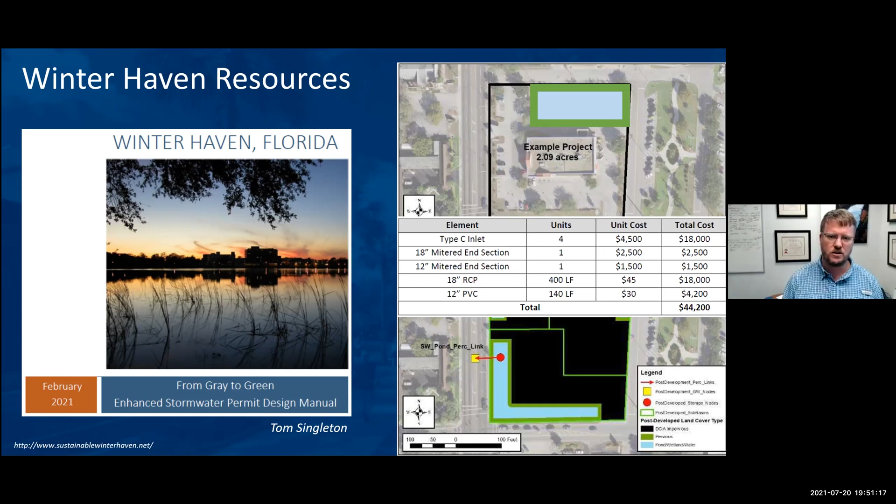So to summarize and wrap up here, can LID and GSI cost less? Absolutely. But can it also cost more? Yeah, if it's done incorrectly, or you want to put water harvesting on the rooftop, that doesn't work out. I also wouldn't recommend things like permeable pavement when it's unnecessary. It looks really nice in a lot of places, but it may not be appropriate, and it may not be the most cost effective.

LID is, if you think about it, the planning stage, and it's really critical that this takes place at the beginning.

Avoid increasing runoff and impacting the site resources. Minimize the stormwater runoff that's going to be generated, disconnecting impervious areas, limiting those disturbed areas, utilizing the existing depressional areas for flood control.

Those are the ways that the cost savings gets realized. And then with GSI, these are the practices that basically manage what runoff comes off the site. So we're looking at bioretention and bioswales being pretty cost effective when it comes to swapping those out for using typical piping that's needed with conventional development.

Green roofs aren't very appropriate for residential applications, so only in a few cases is that going to really pay out for itself as far as being cost effective. But in the right situation, permeable pavements can definitely be cost effective.

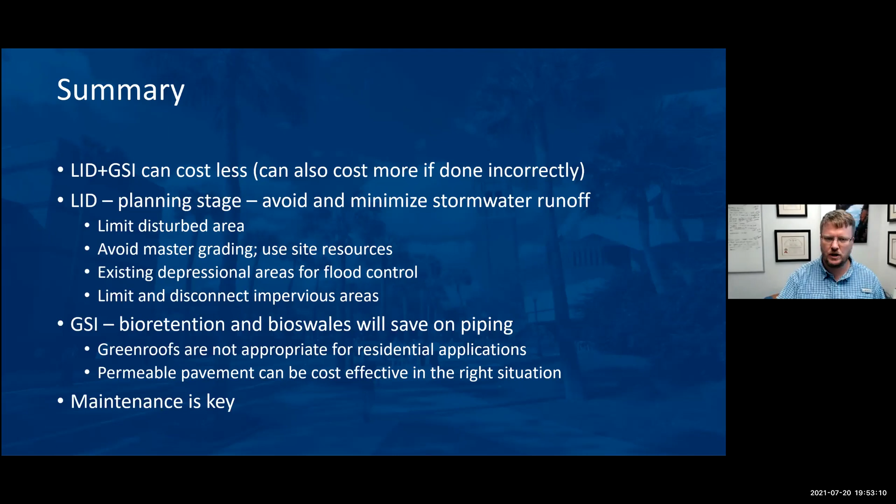And finally, maintenance is key. We don't like to do it, we like to just kind of set it and forget it, but maintenance is key. And we're working on some ways to make that more a part of the general landscape maintenance that goes on when those GSI practices are in there.

So with that, I will take any questions. And notice that the number in the chat box kept increasing as I was talking, but I apologize, I did not see any of those.

That's okay, so I'm a little worried about what's coming. No, it's wonderful because we have been moderating and reading those questions in the chat box as you've been going. And it's funny because a lot of the questions that were asked, the very next slide, you provided the answer. But we will go through some of those questions.

I see that Wendy, Dr. Wendy Anderson has her hand raised. Hi, Wendy, I'm gonna pitch it over to you. Wendy: Sure, good to see you again. Thanks, it's good to hear from you, Eban. This was really informative, and it's exactly what we've been dreaming of hearing about.

When we launched an introductory webinar about this back in March, we had a huge attendance. Kelly, I don't remember how many were actually participating, maybe dozens and dozens, we were well over 100 maybe, but it included a lot of elected officials, a lot of people from city and county engineering and growth management departments, developers, developer attorneys. I mean, it was a great audience.